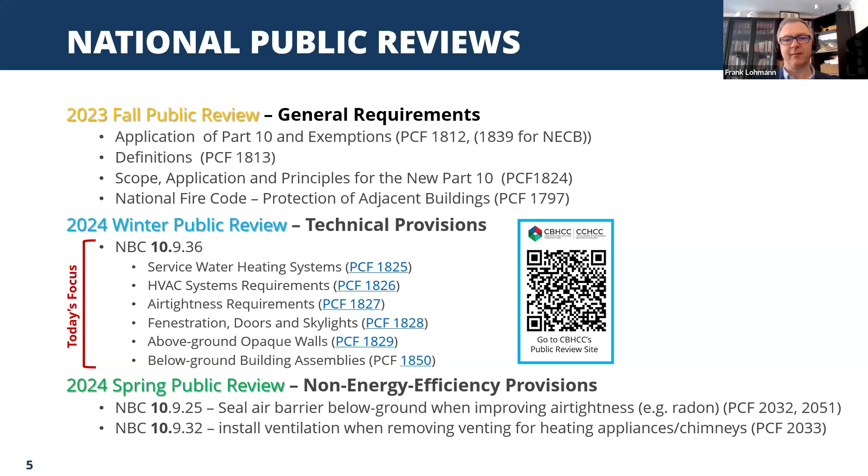So here's a quick view of the CHBA process of how we review proposed changes and how we develop comments during public reviews. We use this process to make sure we're reflecting our members' views in these comments. We're in the second phase here with CHBA national staff, holding information webinars such as this one, reviewing changes and drafting proposed comments. On this particular subject, we may also convene the same working group of renovators that has helped us over the last year and a bit to gather feedback specifically from renovators on these proposed changes.

And after that, we present the comments to the Canadian Renovators Council Management Committee so they can distribute them within their provincial and regional memberships. And we often gain valuable insights during that step. And finally, CHBA staff will submit those comments. And sometimes provincial HBAs submit reinforcing comments or their own comments with province-specific details. Our aim with this process is to ensure that we're aligned on all three levels of the association. Thank you.

Okay, I said I would refresh everyone's memory as to what's behind the subject. Simply put, a few provinces already have renovation requirements in their codes, and many, if not all, municipalities already have bylaws or permits for renovation projects. The problem is they are all different, and that is confusing and counterproductive. So the provinces and territories asked the NRC a while back, and the Commission at the time, to undertake this project. Another driver was also that the renovation market is bigger than the new construction market, and that a renovation code could be more effective in achieving societal goals such as aging in place or now energy retrofits.

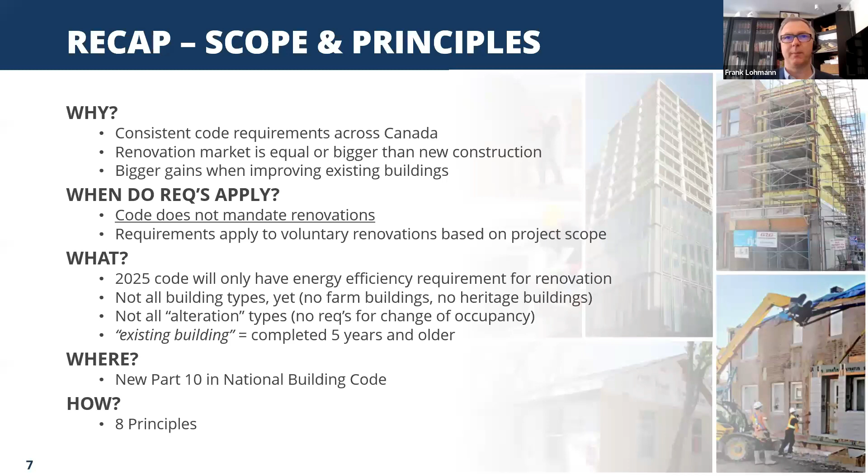The requirements will be located in a new Part 10 of the NBC, so it won't be a separate code. I may have said this last time. And then there were 8 principles developed by the committee that developed the concept. I've talked about those in a bit more detail in the November 24th webinar, so if that interests you, you can refer to that recording.

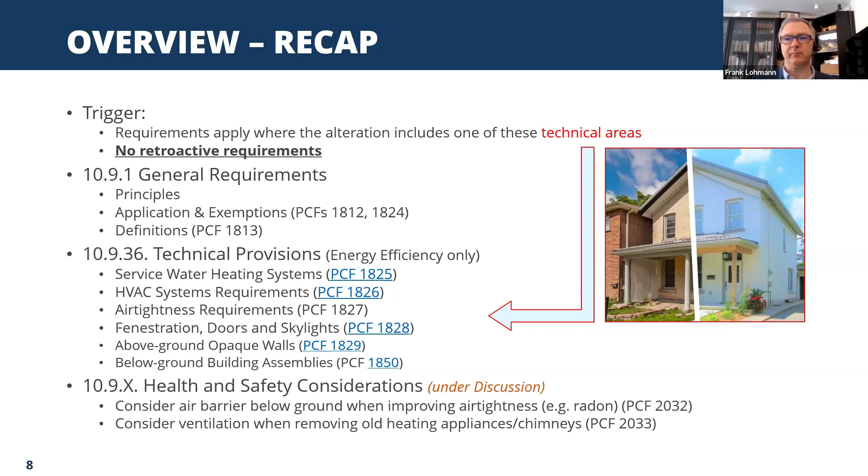Okay, this is my last slide of the quick recap, but it's an important one. Because the requirements in the new proposed Part 10 apply only to alterations, not to additions. For additions, it is assumed that all the then current code requirements would apply as if these additions were new buildings. And in 2025, this may also mean that the tiered requirements and proposed GHG requirements may apply to these additions.

The existing portion of that building, however, if it is also part of the renovation project, would fall under the renovation requirements that are proposed for Part 10. And in projects that do not change the footprint or the elevation, in other words, where the entire project is an alteration, only the Part 10 requirements would apply.

And here we have, again, the definition in a bit more detail of what an existing building is. It is a building that is built more than 5 years before the code was effective. So let's say Manitoba makes the 2025 NBC effective by July 2026. Buildings completed before July 2021 would be existing buildings in that scenario.

Okay, we have another poll on this slide we would like to ask you, which is about renovations and additions. So we'd like to know, in your activity profile, are you doing more renovations, meaning alterations, or are you doing additions? So it's a simple 5-scale survey, so either you do more renovations or more additions, or about the same, or you predominantly do only one of them.

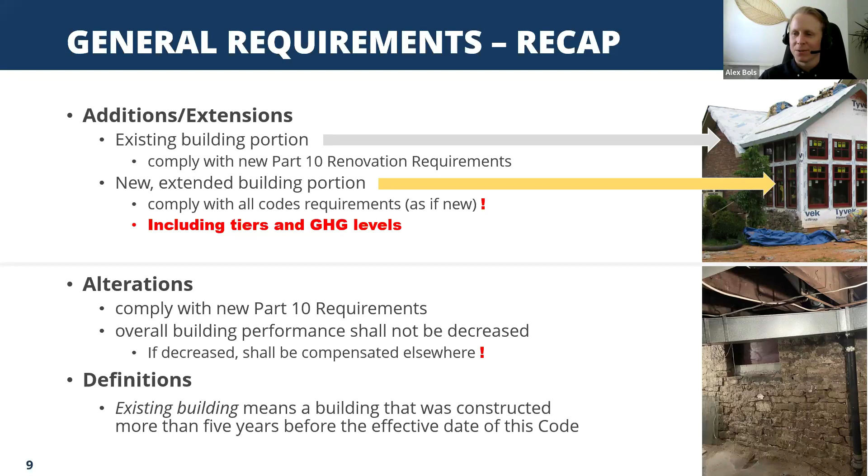Oh, that's great. Nothing else at this time, Frank. You're just doing such a good job, I guess. We'll keep moving, so the floor is yours. Well, this was all recap, so I'm not so surprised. I would expect a few more questions as we get into the exciting technical stuff, if we can use the word exciting when we come to codes.

So let's start with the first technical change.

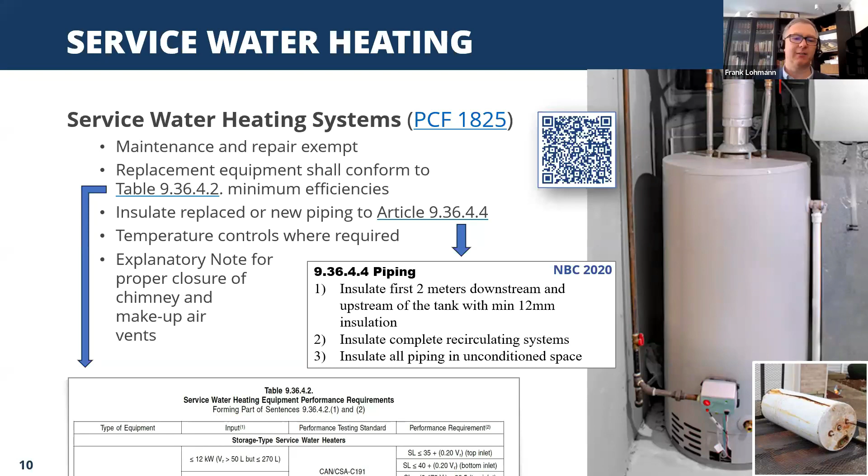The code also mentions that there might be some provincial regulations on automatic temperature controls that may need to be complied with. And my understanding is that where these requirements exist, such as in Ontario, it is already current practice to add them to water heaters during renovation projects. And then there is an appendix note here for both service water heating and later HVAC requirements to make sure that old chimneys and makeup air vents are covered and sealed properly, which again is probably a safety concern and should be current practice.

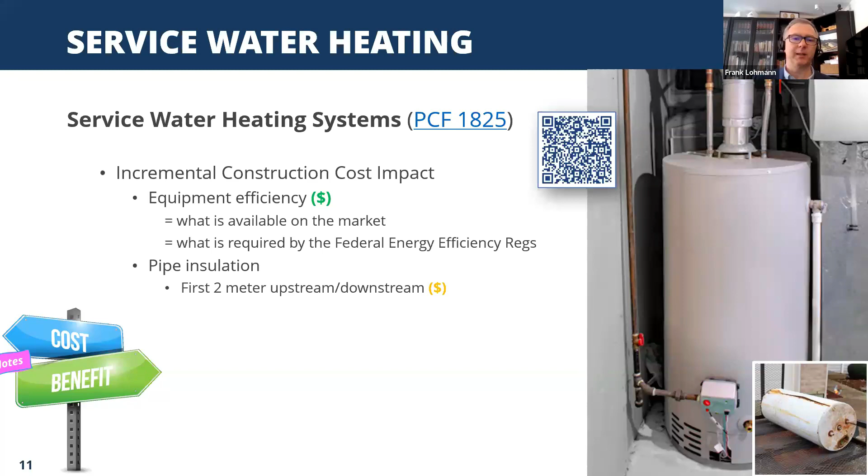On the costing side here, when we compare current practice with code requirements, the equipment efficiency upgrade is considered cost neutral because the federal government energy efficiency regulations do not allow trading anything within Canada with lower equipment performance. So in other words, the code requires only what is available on the market, and the same is true for the automatic temperature control valves. They're not regulated, but they're also current practice. The only incremental cost here that we can see is the pipe insulation. If that wasn't part of your current practice in renovating before, that would be an incremental cost. But even at that, it is a fairly low cost impact.

Let's get to HVAC systems then. Again, as you see, maintenance and repair of these systems are exempt from the requirements, but all HVAC systems and equipment have to comply with the same requirements as new construction in the base code. And I'm just going to pause here. That surprised me a little bit because I thought in the past it was done the exact same as the service water heating, just the equipment tables. I found out yesterday it's all of the design issues.

I've lined up all these issues here that have to comply, and I can see a few issues arising in an existing building. In the previous edition, as I said, it was just the equipment efficiency. Now it's piping, location of equipment, and sealing of ducts as well, although that's clarified. So we will look at that with the renovators in detail here. After that, it becomes a little easier to deal with the requirements here for alterations and additions separately. So where existing ducts or plenums are accessible, that portion of ducts or plenums should be sealed. In addition, all new ducts would need to be sealed, which is already covered in the general reference above.

Then for additions, where previously unused spaces are converted to habitable or occupiable space, they should be provided with ventilation. And where capacity of the existing HVAC equipment is adequate to serve the existing or extended space, the equipment efficiency requirements need not apply. But I've pointed out here that those two bullets essentially need an analysis according to CSA F280. I just mentioned ventilation here, but it also applies to heating, and you'd have to do a CSA F280 assessment in order to know whether it's sufficient or not. And lastly, there's an appendix note here, again, for the proper closure of chimney and makeup air vents that I mentioned already.

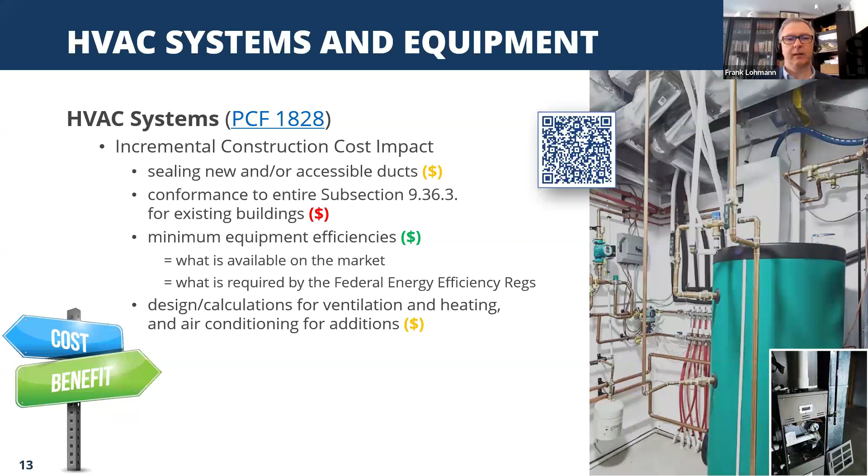So what that means in terms of windows is if you replace a window, let's say, or a couple of windows in a 10-year-old net zero building, you might have to make sure that you replace the windows with the same or better performance of what they currently are. In other words, it could be that they are better than the minimum code, and then you would have to replace them with that. So that's the note here that applies.

An additional requirement is proposed that requires the window-wall interface to be airtight. And again, I think that should be current practice, but please let us know if it's not, because we're talking about energy efficiency here. That is critical.

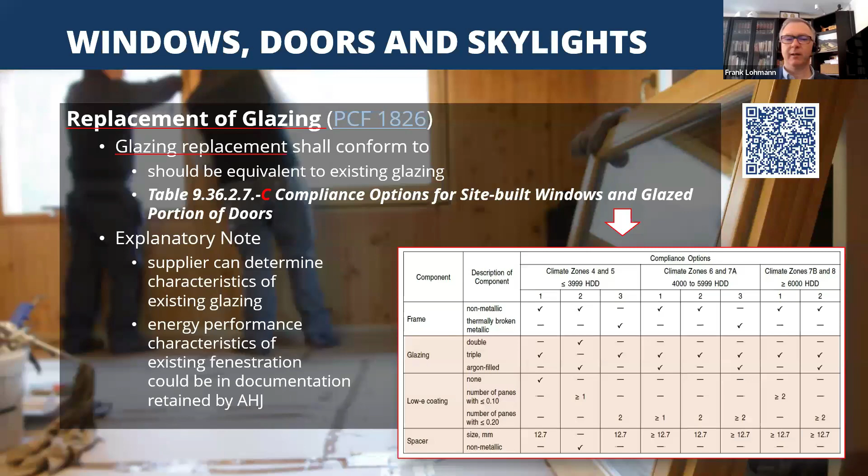And the table on the bottom right is the one that would apply in this case if you only replace the glazing. It has a few options for each climate zone based on the frame that you put the glazing in. And you can find out what type of glazing then is required. So, for example, let's pick the last two columns in Edmonton. You would have to fit triple glazed half-inch glazing with 2 or more low-E coatings in those existing frames. So it's a very prescriptive lookup kind of solution.

We think making the wall-window interface airtight can be considered cost neutral in terms of cost benefit here. It should be acceptable, low cost impact. However, we have some concerns on the administrative cost of the glazing replacement requirement and how it would be enforced to find out what the current glazing performance is, because it's not labeled on the glass.

It is not clear to us what the cost difference might be between the selection of proposed code windows versus what renovators would install today, because that really is the test we have to do for incremental cost: what's current practice today and what would the code require. And we find that the cost impact analysis of this change misses that point a little bit, because they're making the point of the benefit of replacing your windows, which by the time your clients have hired you, you've already made that case. So we're probably going to comment on the impact analysis on this one.

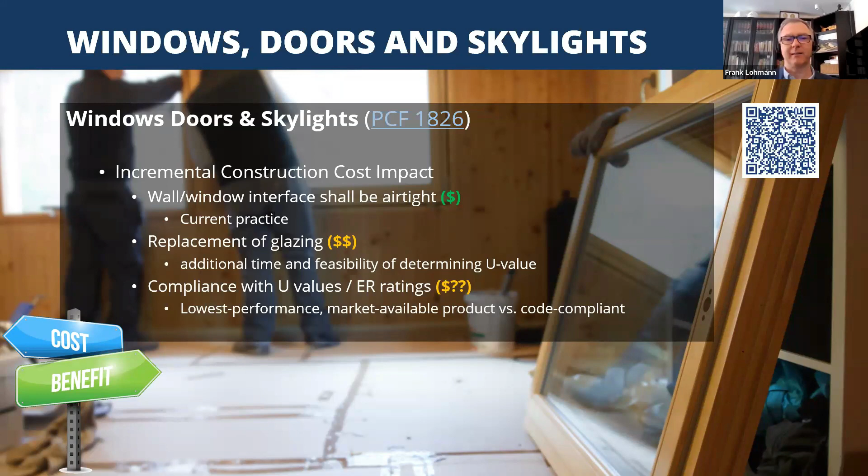Frank, if I could just jump in here, there's a few questions regarding the last handful of slides. One of the questions that came in is, what about making windows bigger? If the opening is getting bigger, would this apply? Yeah, it would apply to the window requirements, I would say. If this is an existing building, meaning older than 5 years old, you'd have to follow these U-values for that larger window. In Part 9, we don't have the fenestration-to-wall ratio, so you're not governed by that. You're governed by the U and ER values.

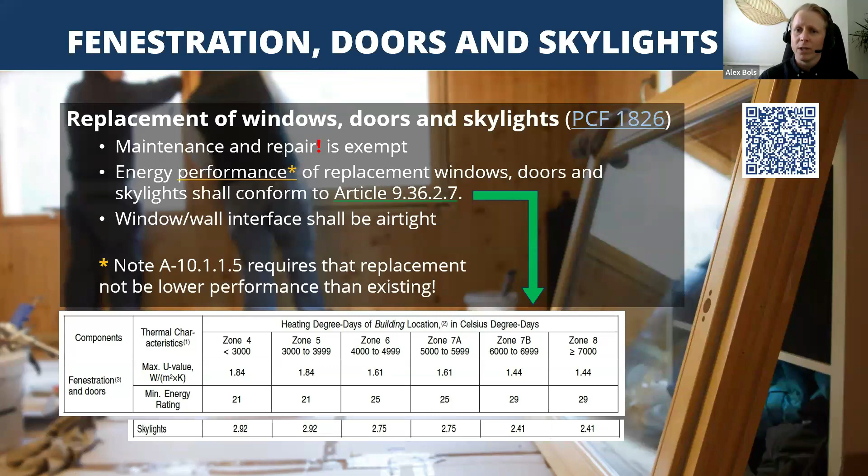That's very clear. One more question regarding HVAC, from a few slides ago, just to reiterate what you had explained. If you are replacing the HVAC, but not opening walls, is that not acceptable with what you have written? Yeah, if I understand the question correctly, if it's really just, let's say, you replace a furnace with a heat pump, this is in what I thought was the previous edition here. It would just say follow the equipment efficiency table, and that would be all that you have to do.

And the ducts that are accessible, you have to seal them. So really, it will be only the ones, the main plenum that goes up. And so that should be acceptable as long as you have the equipment efficiency that the code is asking for. And you don't have to redesign the entire system.

So this sentence in the actual code is missing a "where applicable." In other words, if you take out the ducts, obviously some requirements would apply, or if your location is wrong, which means the location of the equipment. So those are all kinds of questions we need to investigate a bit. But otherwise, simple, furnace out, heat pump in, should only matter in terms of the equipment efficiency.

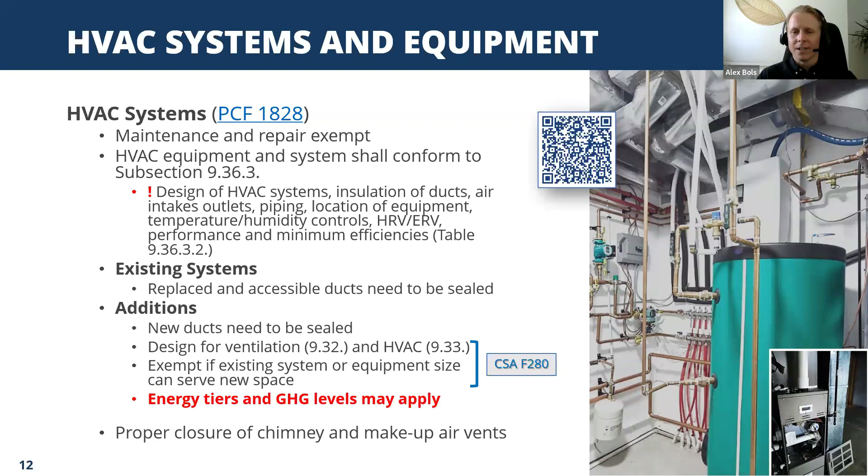Yeah, that's very clear. I'll let you get back to airtightness. Thanks, Frank. Thanks for reminding me where I was.

Okay, the proposed requirements for airtightness are actually fairly simple. They apply whenever you make a hole into an existing air barrier or where no air barrier exists. In those cases, the proposed provisions say that you either seal those areas or install new air barrier systems according to the prescriptive requirements in 9.36, or that you test the entire home. This would be, for example, the case of an energy retrofit that receives grants or has to comply with the EnerGuide system for other reasons.

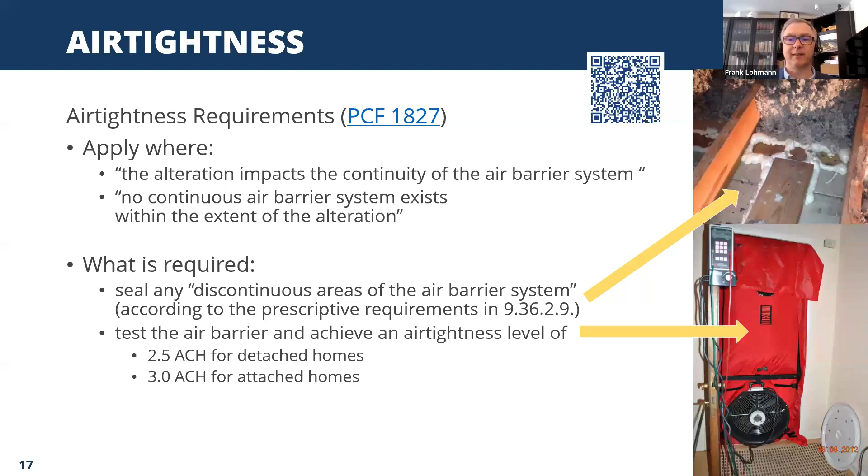The testing could also be used if you're building an addition and your province has adopted a higher energy tier where you can receive prescriptive points for airtightness. While the proposed requirement for airtightness is surprisingly simple, improving the airtightness in a renovation project and not interfering with other building systems can be a challenge. That's why the committee wrote a longish explanatory note here on the house as a system.

The note points out that there are many possible air barrier materials and that many building materials also have multiple functions. Some insulations could be air barriers, some air barriers could be vapor barriers, and so on. The note then recognizes that there are simple cases where maintaining or improving airtightness doesn't cause any or many implications for other building systems, and those simple cases would be like a single room or single space renovation, or on the other side, a whole building retrofit. That makes it simple because you're dealing with all surfaces.

The note then discusses the more complex cases of half-house renovations, where issues of thermal comfort, ventilation, or the risk of condensation may have to be taken into consideration. In other words, there are known implications for other building systems. And in this context, the proposed appendix note then references CHBA's Renovators Manual. There's quite a bit of information in there on how to deal with these things.

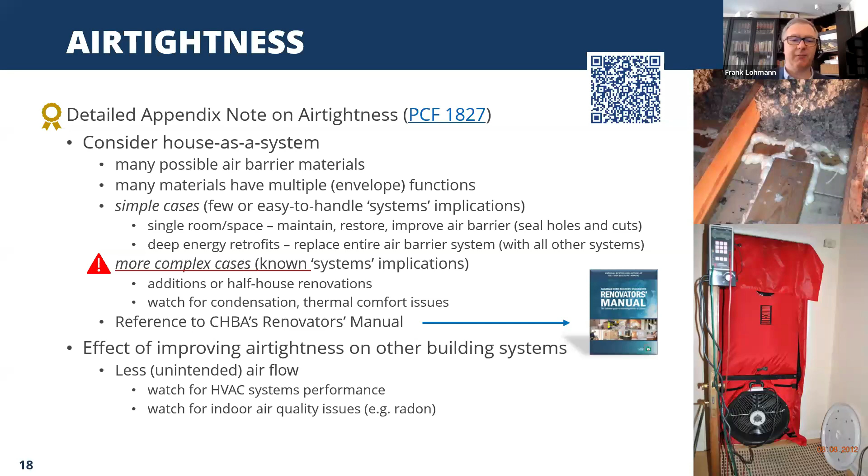The last portion of the explanatory note then highlights the direct impact of improved airtightness on the effectiveness of ventilation and/or heating or cooling systems, and the impact that improved airtightness may have on indoor air quality, namely radon, I think is mentioned there as well.

On the costing side, there's not much concern. Like we can see here, when we spoke to renovators, we found that sealing air barriers or installing air barriers where there were none is common practice. That doesn't necessarily mean it's simple or cheap. It just means it's common practice to do that. In that sense, the code requirements would be cost neutral because it doesn't require anything that we don't already do.

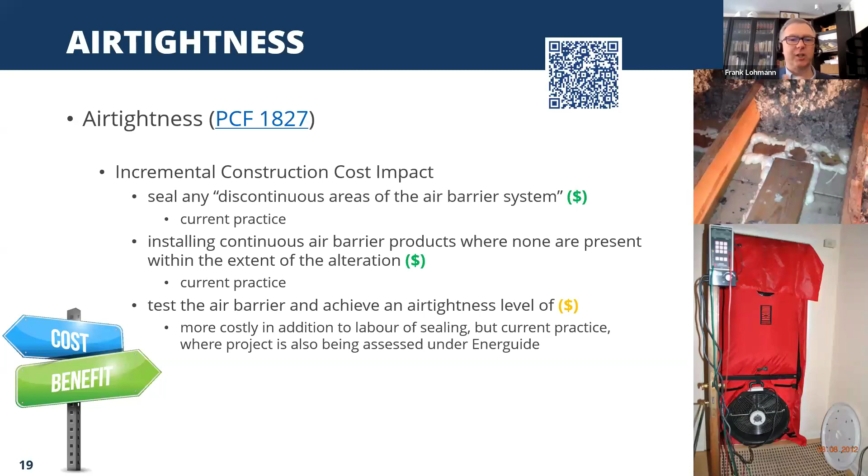There may be a modest increase for airtightness testing in addition to the labor of installing an air barrier and sealing penetrations and so on, which has to happen anyway. But testing, as I said earlier, offers a more seamless integration with the energy incentive programs.

That brings us to R values. Thermal resistance: we start with the above grade assemblies, walls, attics, floors over unheated spaces, and cathedral ceilings. Again, maintenance and repair would be exempt. All the other requirements can be summarized really in three simple steps. Assess the R value of, let's say, the wall or ceiling you're renovating. Bring up the insulation value to the code minimum. Then follow all Part 9 requirements for installation of insulation.

However, the committees recognize that there will be situations where it isn't possible to achieve that. In older versions, this provision said apply insulation where practical, but that was also very qualitative, and it's very difficult to say what's practical. So in the end, the committee agreed to say improve the assembly to the extent possible, which I have to agree is probably a better way to say that.

The code even recognizes a number of limitations or conflicting requirements, and in the associated explanatory note, they explain that in extreme cases, this phrase, to the extent possible, may mean not at all possible. And the sentence is clear that you can also use the trade-off method in 9.36, where you can insulate one assembly a little more in one place in order to make up for areas that are difficult to insulate, as long as the sum of all areas and R values are equivalent.

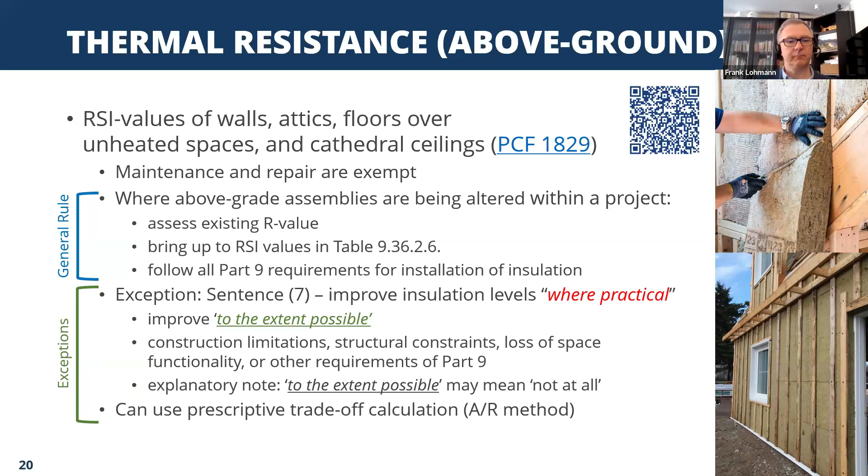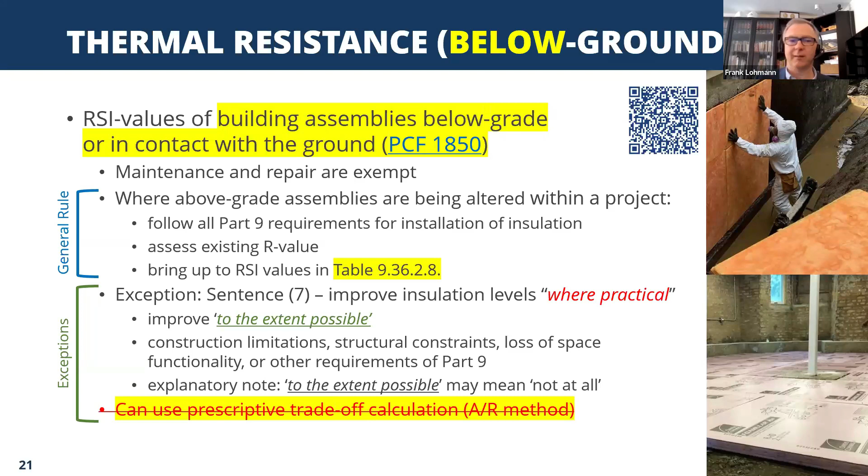The requirements for below ground assemblies, like basement slabs or foundation walls, are almost identical to those we just discussed, except for what I highlighted here in yellow: a different code table for the reference of the R values, and the fact that you can't use the A over R method to trade R values between assemblies, because that method does not apply to below grade assemblies.

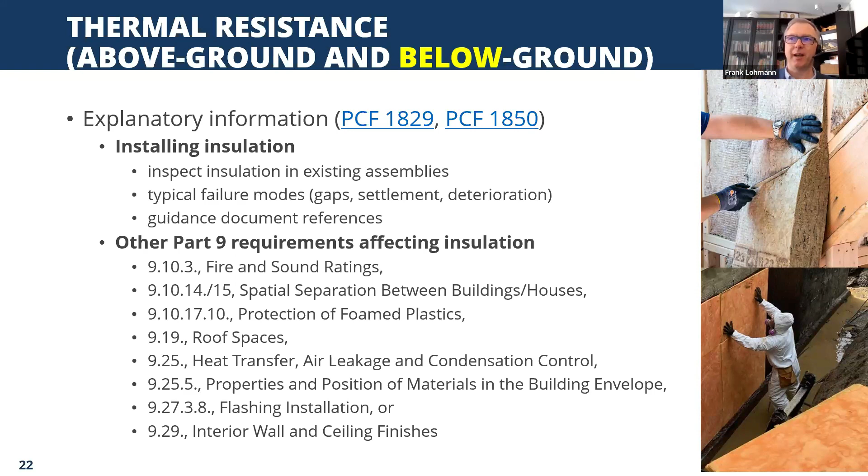The explanatory note in this section then applies to both articles, and that's what I was talking about earlier. They talk about typical insulation issues in existing buildings and reference some guidance documents, typical failure modes of insulation, for example. And then there's a list of key insulation requirements in Part 9 that I mentioned earlier. So the requirement is in the code, and the list of typical Part 9 insulation requirements that may affect your project are listed here.

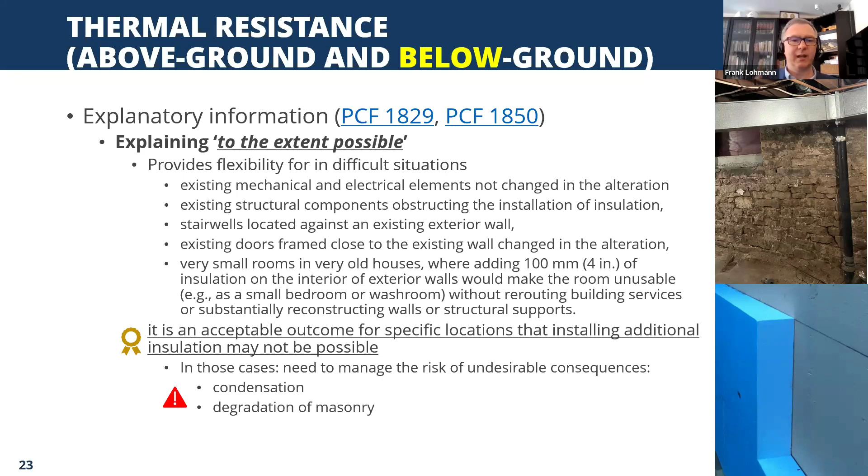Here's then a summary of the explanatory note on the extent possible. It lists a number of these examples where limitations exist, and then it states that it is an acceptable outcome for specific locations that installing additional insulation may not be possible. But in those cases, this note then cautions that there could be undesirable consequences, for example, condensation, or I think they also mentioned degradation of masonry, and we found this great picture that points it all out. So you have to be careful not to cause condensation.

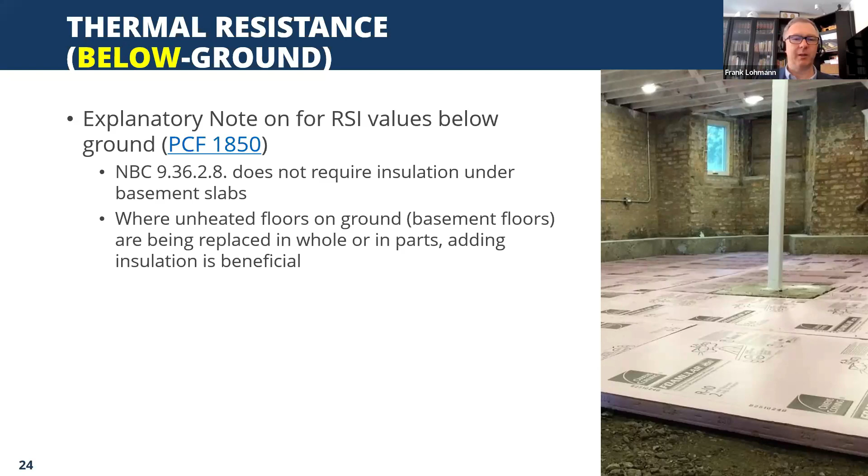And oh yeah, there's one more appendix note here that clarifies that the base code does not require insulation under the basement slab, and that it is therefore also not required in renovations. However, the appendix note suggests there are benefits of doing so where the whole or substantial parts of the basement slabs are being replaced. So that's a good suggestion. It may or may not apply to your project. And it's in the appendix, so it's not binding.

On this subject, PCFs 1829 and 1850, below and above grade, the incremental construction cost may actually be significant. It's the only one, really. If I summarize the requirements, in both of those cases, where these assemblies are being altered within a project, all Part 9 requirements for insulation apply, and R values need to be brought up to code values in these tables. This may actually impose more cost than what your project included.

Think of a siding replacement, for example. You're altering the exterior wall, and the R value requirements would therefore apply if the wall isn't already up to the code level. So this could potentially add cost to your project that you didn't have before. That's why this is the only one that adds significant cost.

This is known, and this was actually deliberate by the people who wanted this renovation code or these requirements, because it is something that they refer to as an opportunity cost or an opportunity policy case, and it was one of their motivations to actually get this going. Because one reason for these requirements to be here is that they wanted to move the needle in improving the energy efficiency performance of the existing building stock.

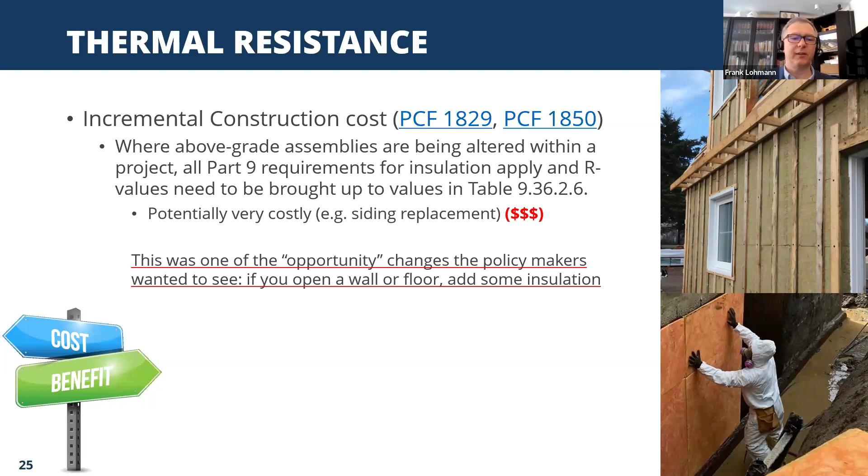With that, I'll get to the other two changes that we're expecting for the public review in the spring, and they both refer to house as a system considerations. Alex, maybe I should stop at this point. Are there any questions so far on the previous set? Yeah, there's some really good questions coming in. We'll go through a couple. Pardon me for paraphrasing some of the questions, but we'll go back to HVAC, Frank. Yep. When adding the HRV in the system, would you need to redesign the ducting?

That's really a question for an HVAC designer. First of all, can the HRV handle the existing ducting? I would see no reason, but if there are performance issues, then maybe yes. So that's more of an HVAC design question. Is it necessary in order to make the equipment work effectively? In my understanding of the proposed requirements, the scope of the project determines what requirements apply, and if you only replace your ventilation appliance, then only requirements for that scope should apply. So the answer would be no.

If there are any ducts visible or accessible, they would have to be sealed. And again, they tried out a lot of different pieces of wording: if it's practical, if it's accessible, if it's within reason. So the committee played with all of those things. That's definitely the spirit of the changes, but how it's interpreted is then subject to the discussion between the renovator and the building official sometimes. Of course. On to the next question. What is the trigger for radon requirements?

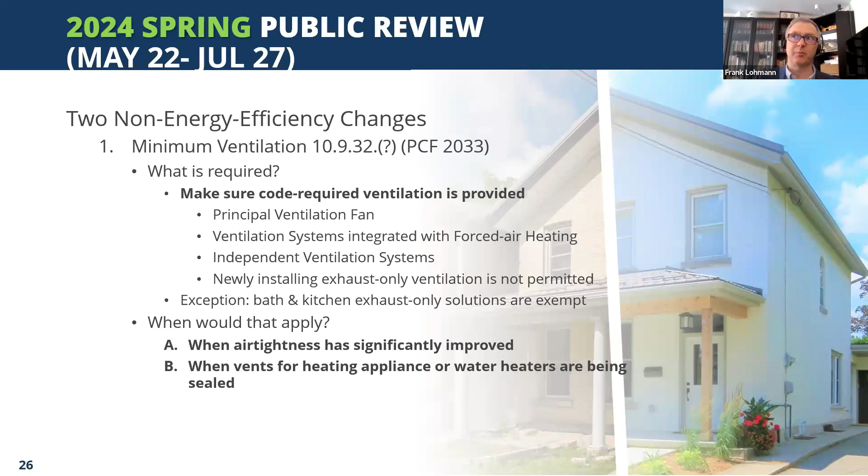So then it asks for a proper ventilation design in that case because you sealed up some other stuff. I think that makes sense for sure in case A there for ventilation and for airtightness, where you may have improved the airtightness significantly, as we just discussed with the radon example, actually. The second item yet to come is about sealing foundation walls and basement slabs. This one talks about the radon issue, actually.

The main reason for this is to minimize the risk that indoor concentrations of radon and soil gas are increasing, even though you have tried to improve the overall performance of the home. So this would counter that general rule of can't make the home worse. Essentially, what will be proposed here is to seal all accessible exposed cracks and penetrations in areas that are within the extent of the alteration.

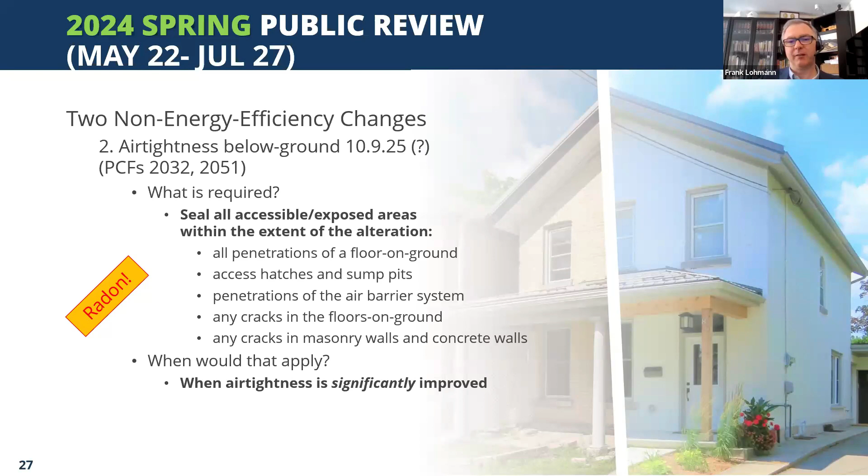Below ground, this would be triggered in projects where you have improved the airtightness significantly, as I discussed earlier. I would assume that a basement renovation would have done this as current practice, but I would think this is an important consideration where your project only renovates an upper story and makes it much more airtight. In that case, in particular, you may want to make sure radon is not inadvertently increased.